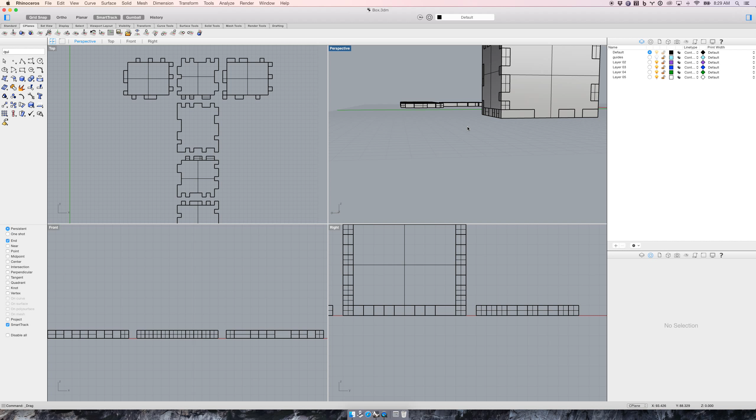What you've got to make sure you do is have everything flat, and then we're going to take advantage of a function called make 2D drawing to get the perspectives totally right. It's a little different than SketchUp. We're not going to actually set up the camera; we're going to use the built-in cameras for us.

All right, let's give it a shot. We need to go over to drafting, and click make 2D drawing. It asks for the object, so I'm going to hold shift and click on the objects that I want to create a drawing of.

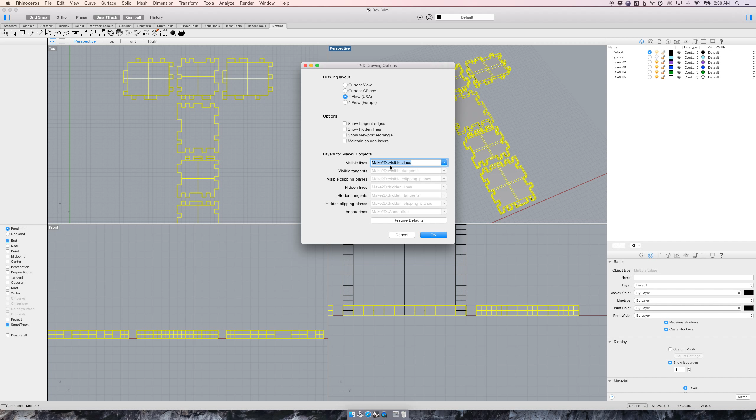Then it asks a bunch of questions. You probably have a bunch of these options selected by default. I turn them off because they create extra geometry, which can create false cut lines. I don't want them, so I'm going to say OK. It's going to think for a minute.

And then if you zoom way out, you can see it actually creates these 4 perspectives. It also made a new layer, make 2D.

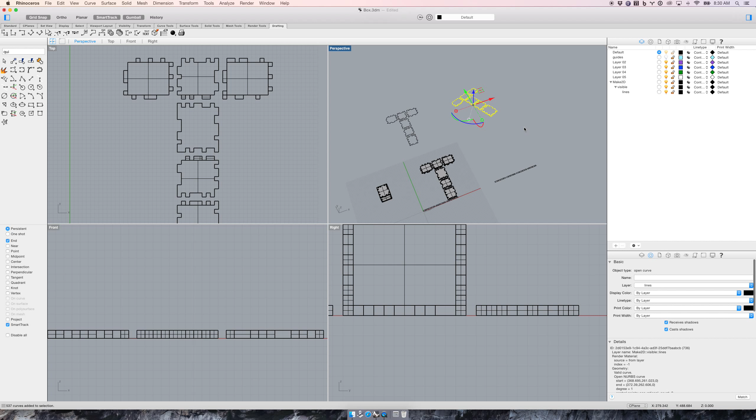You can hide that layer just like any other layer, and you can delete stuff off that layer, which I don't need any of those things, so I'm going to delete them. Select that stuff and delete it. Don't need it.

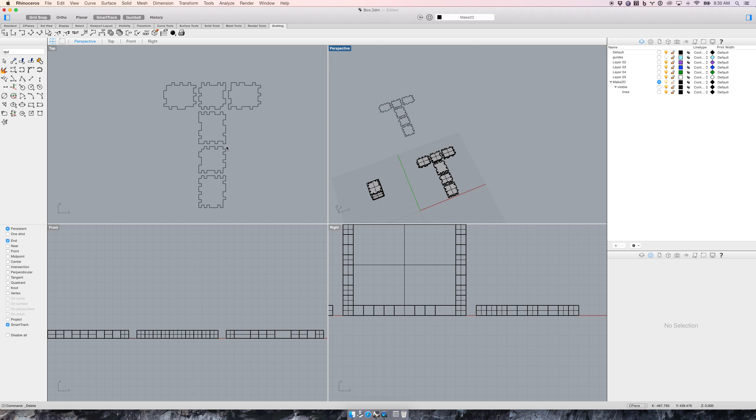Okay, so let's go in and look from the top view at our cut. That looks great. We can now take those things, I'll select them all, and go to File, Export Selected.

I'll just drop this on the desktop, and then I want to save it as a DXF. Now you can select options now, or at save time it'll pop up a box, and there's a specific option you've got to select: box, laser, cut.

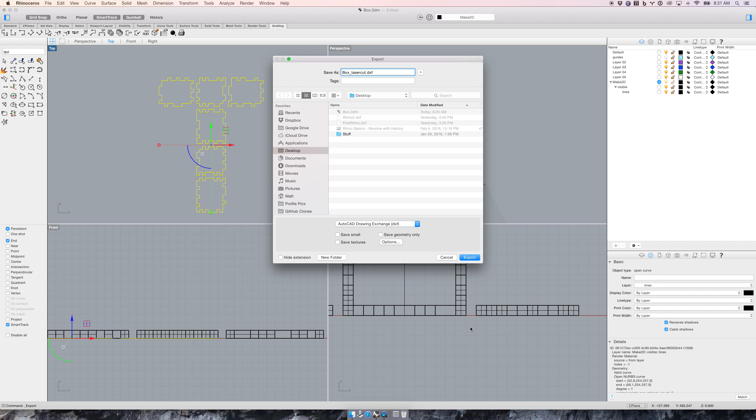And then you want to make sure you choose 2004 polylines. You can say always use these settings if you want, so you don't have to do it every time. I can't think of a reason I'd want to change it, maybe the CNC machine would require different ones, but for our laser cutters, 2004 polylines works great.

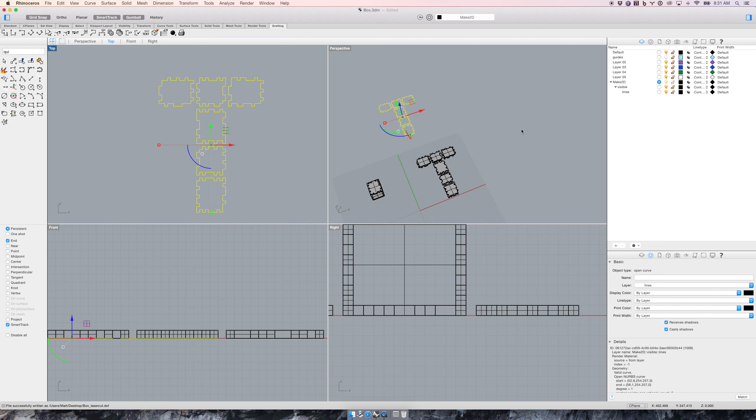Press export, and then it makes a DXF file, which you can then take over to the laser cutter, import, and it'll cut great.